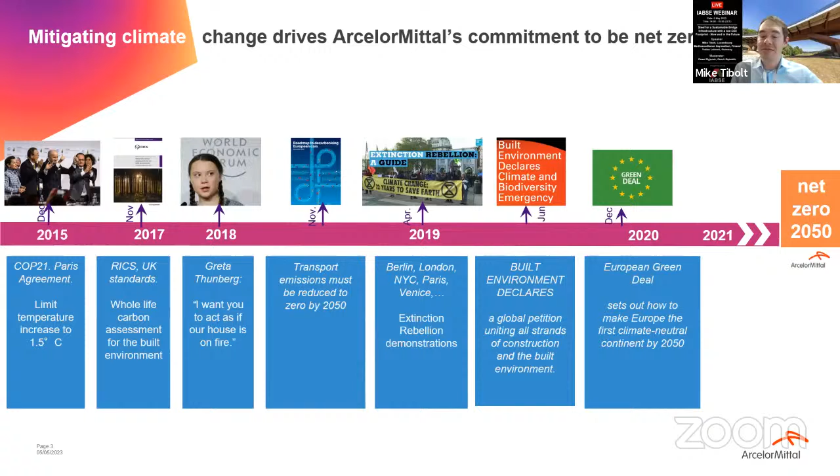That's why, as a steel industry, we have the responsibility to decarbonize and reduce our footprint. Starting with the Green Deal in December 2019 to make Europe the first climate neutral continent by 2050, ArcelorMittal commits to be net zero in 2050. If we have a look at steel, it is critical for the transition, and it is a backbone of the net zero economy, without any doubt.

As we can see, steel plays a core role in electrical vehicles, and also in the infrastructure for renewable energy, like wind turbines or solar panels. But it's also important for the next generation of high-performance buildings, helping to reduce their carbon footprint. And what's true for buildings is also the case for infrastructure, especially bridge infrastructures of the future. Here, steel will play an important role going forward.

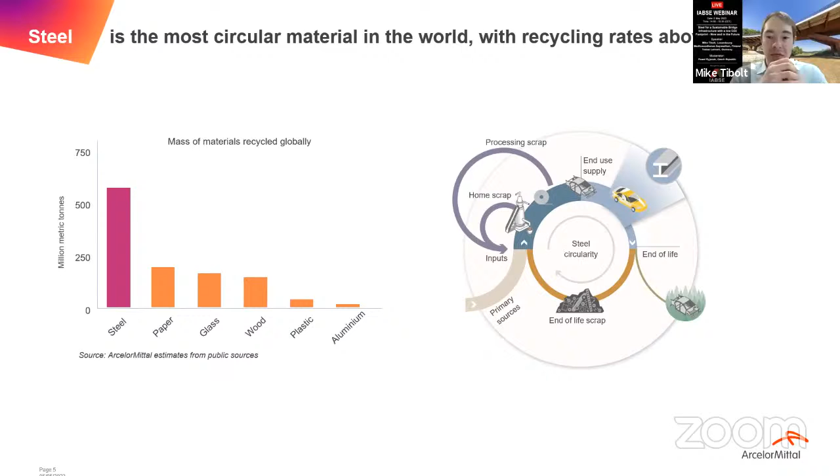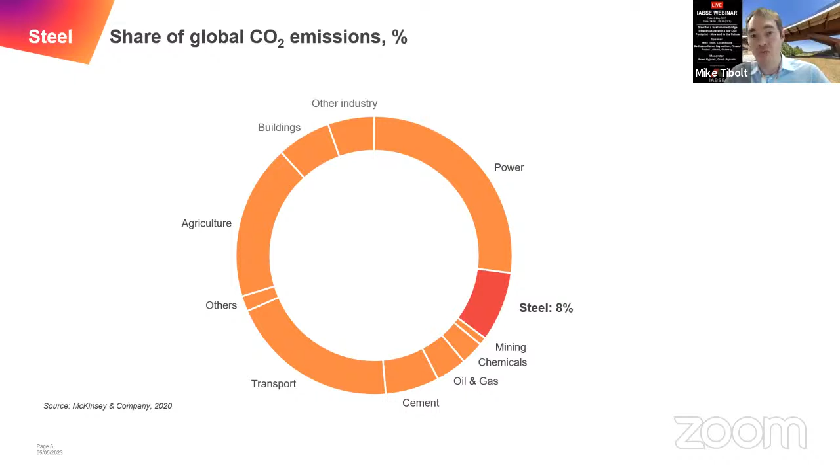Already today, steel is the most circular material globally, with a recycling rate above 85%. So we can see there is potential for steel. On the other hand, steel production is also responsible, globally, for about 8% of CO2 emissions. This is a significant number, and we have a responsibility to reduce our carbon footprint.

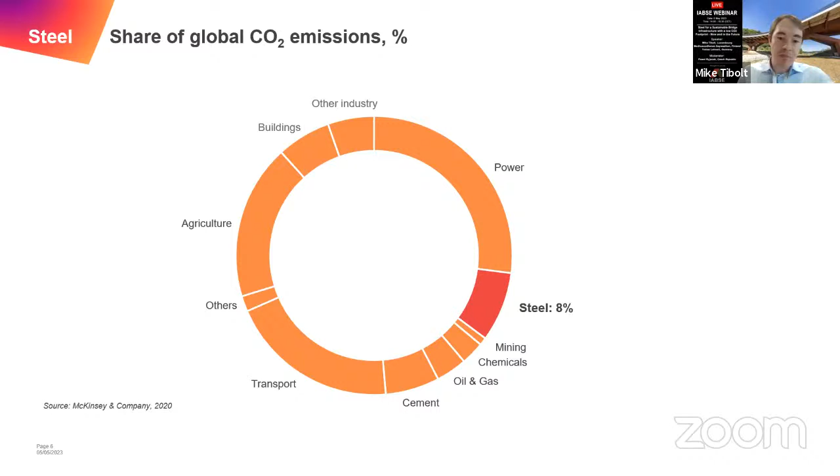I will present how this can be done from the point of view of ArcelorMittal - the action plan to decarbonize steel production.

In 2019, ArcelorMittal published its first Group Climate Action Report, stating that ArcelorMittal Europe would reduce its carbon emissions by 30% by 2030.

In 2020, the European Climate Action Report was published, and here ArcelorMittal set the net zero target for 2050.

Then, two years ago in 2021, the second Group Climate Action Report was published. On the global scale of the group, ArcelorMittal commits to reduce its CO2 emissions by 25% until 2030, and on the European level, up to 35% - an increase of 5% compared to the initial target set in 2019.

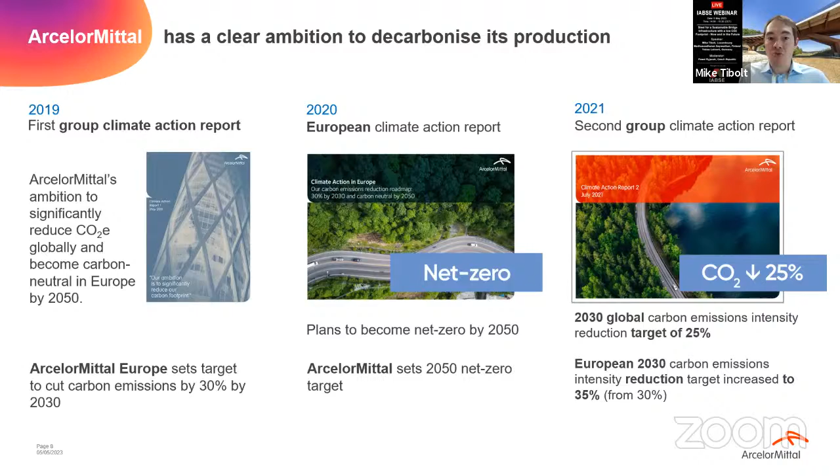The question now is, how do we get there? So let's first look at each steelmaking route commonly used to produce steel, and what the carbon footprint of each production route is.

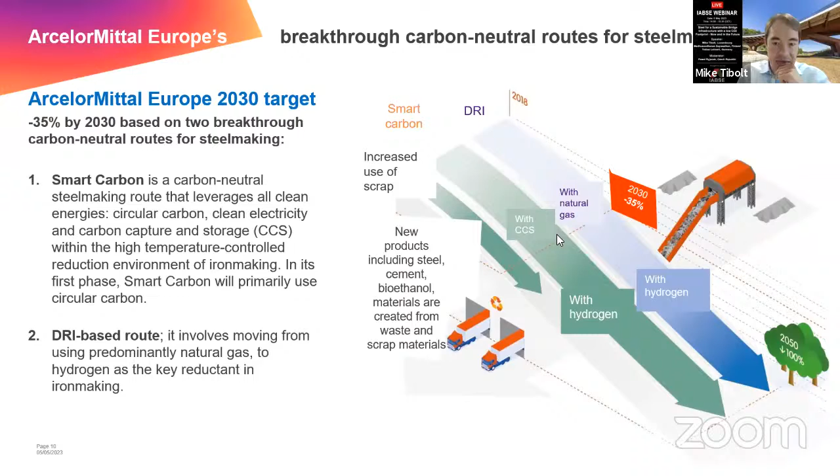So these are the technologies that we identified to become carbon neutral. Now the smart carbon route, what is ongoing there?

One example of the smart carbon route is the Torero process, where we turn wood and plastic waste into biocoal. We dry this waste and torrefy it to produce a biocoal.

This biocoal will be used in the blast furnace to reduce the coal coming from the mines. At the moment we have an industrial scale demo plant in Ghent, Belgium, with 2 reactors, each producing 40 kilotons of biocoal per year. It is expected to start in 2023 for one of the reactors.

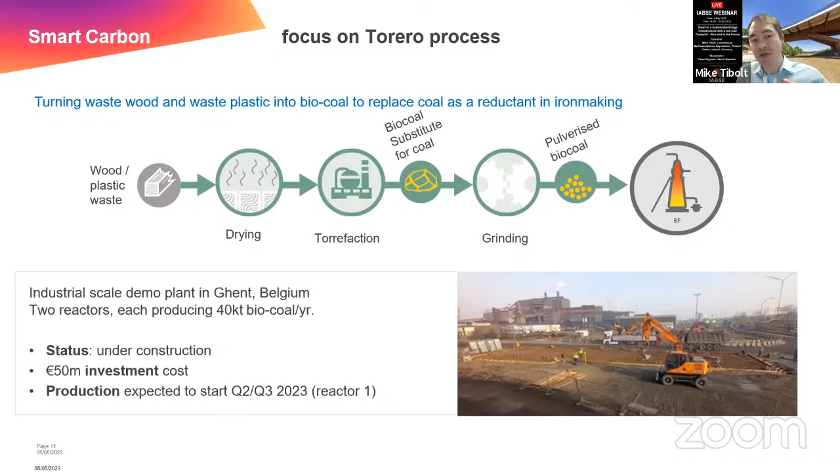This will help us reduce CO2 emissions already in the blast furnace, corresponding to the smart carbon route. Then on the DRI route, the first step is to replace natural gas, currently used as a reductant, by hydrogen. In the first step this will be blue hydrogen, meaning hydrogen produced by electricity not coming 100% from renewable sources.

And this will be the case in the second step, to switch from blue hydrogen to green hydrogen, produced from electricity that is 100% renewable, mainly solar and wind. By doing so, we can achieve the target of being net zero in 2050. This is the long-term perspective, step 2.

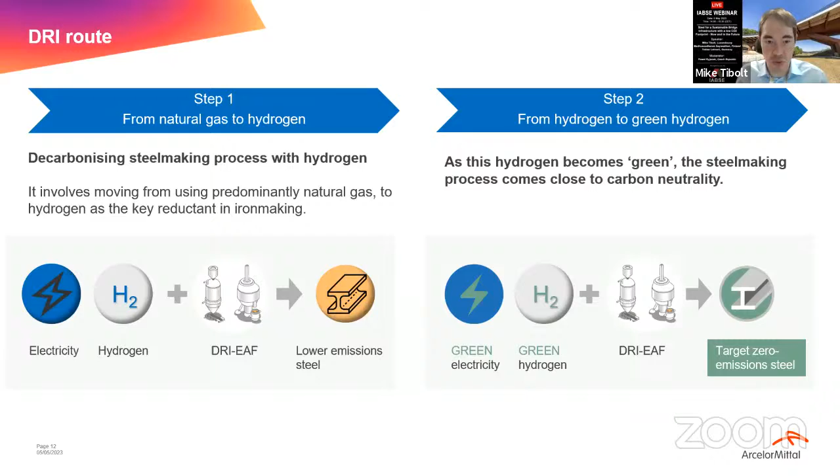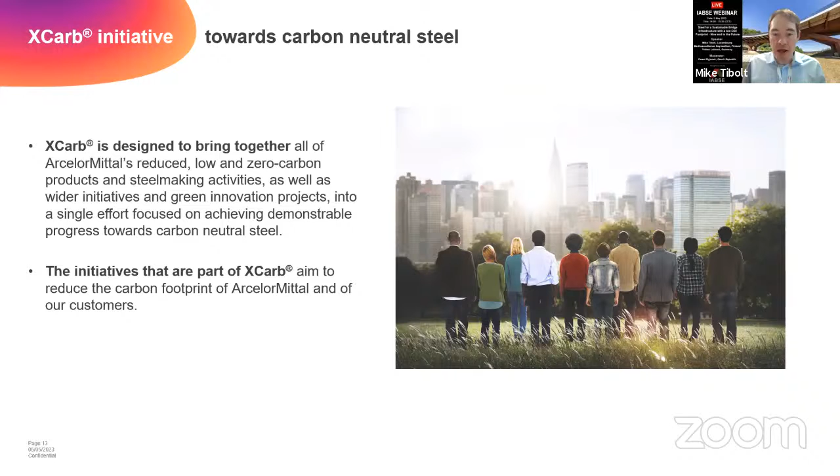With all these efforts already planned and ongoing, we launched what we call the X-Carb brand. This is designed to bring together all of our reduced, low and zero carbon products and steelmaking activities, and to put on the market a steel product with an already low emission embodied carbon footprint, working under the umbrella of the X-Carb brand. This is what I will present in the upcoming slide.

Starting with X-Carb recycled and renewably produced: this brand covers all steel produced in the secondary production route, meaning by electric arc furnace, using 100% green electricity purchased via guarantees of origin in the European system, feeding the whole production line with this energy, and using up to 100% scrap.

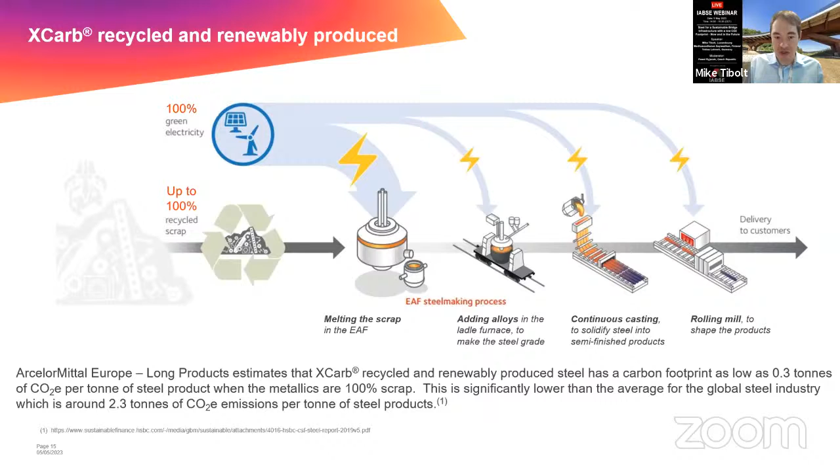By doing so, we can reduce the carbon footprint of the product down to about 0.3 tons of CO2 equivalent per ton of steel. This is significantly lower than the current average of steel production, which lies at 2.3 tons of CO2 emissions. This is the ideal, and this is how it works.

So what can we guarantee to the customer? As I said, X-Carb recycled and renewably produced is certified, and this certificate guarantees that the electric energy used to make the steel comes from renewable sources, mainly solar and wind power. The certification process has 4 steps.

In the first step, we purchase renewable electricity via the guarantee of origin in the European system. Then we follow up this order system, so the guarantee of origin is used to produce the steel, and later it is eliminated from the system so it's not used twice or several times for the same steel.

For step 3, we deliver the material documentation with the X-Carb certificate, and finally deliver the final product to the customers. So this is a product which is already on the market and available.

We also have environmental product declarations, instruments to communicate publicly about the key environmental impact of specific products. These EPDs are based on life cycle assessments according to corresponding standards and are independently verified. We have an EPD for our hot rolled sections with a value of 333 kilograms of CO2 equivalent per ton of steel.

We have them for sheet piles, which can also be used for example for bridge abutments, with a value of 370, and for rebars, with a value of 300 kilograms of CO2. Now it is like it is.

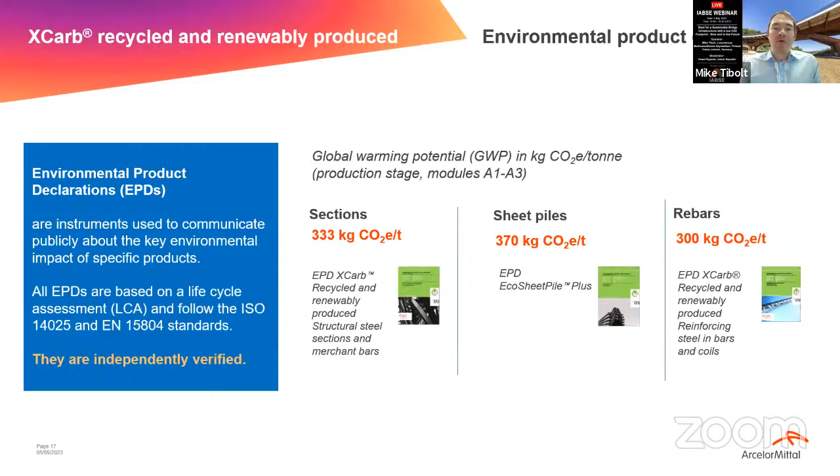We know that each country can also have its specific rules and criteria, so a general EPD will not be sufficient to cover the market. For example, in France they have an EPD which is called FDES.

It covers additional steps in the use of steel, like for example the transportation of the steel product from the mill to the construction site and the mounting on construction site. And here we have a value also of 388.

We have an Eco Sheet Pile Plus EPD for sheet piles in the US and also for the Dutch market, so to comply with this specific criteria on each market.

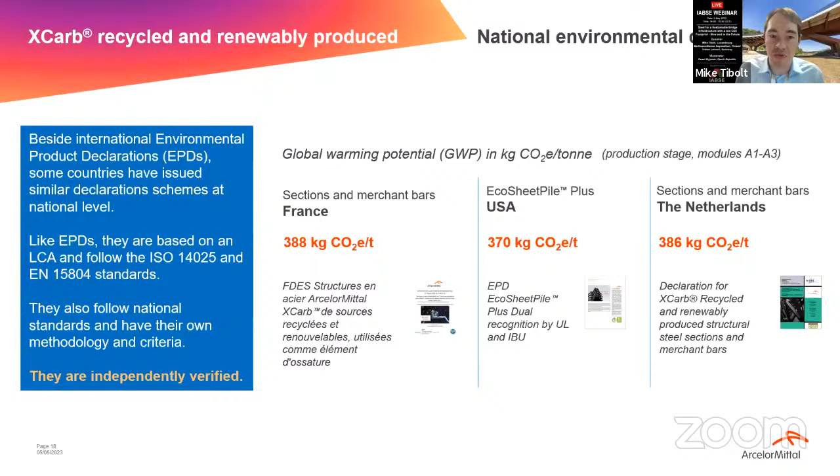Then we also have this brand X-Carb recycled and renewably produced for our heavy plates. These are plates produced by slabs. The slabs are produced in electric arc furnace route using 100% scrap and 100% green electricity. Then the slab is transported to the rolling mill in Gijón, Spain by ship and road, where 90% is represented by ship transportation. And then in the mill, it will be rolled to the final plate.

And here, if we sum up the emissions, we will lie between 0.9 and 1.1 ton of CO2 for the product stage A1 to A3, so manufacturing and production of the product.

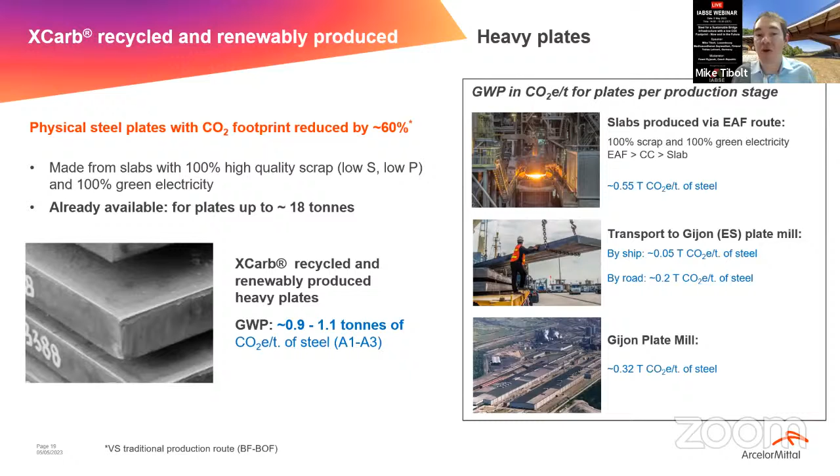And what is coming soon is that we will also have an EPD for those heavy plates under the X-Carb brand. This is foreseen in Q3 2023, in addition to the EPD which we already have for the plates produced by the blast furnace. I will come back to this in a second.

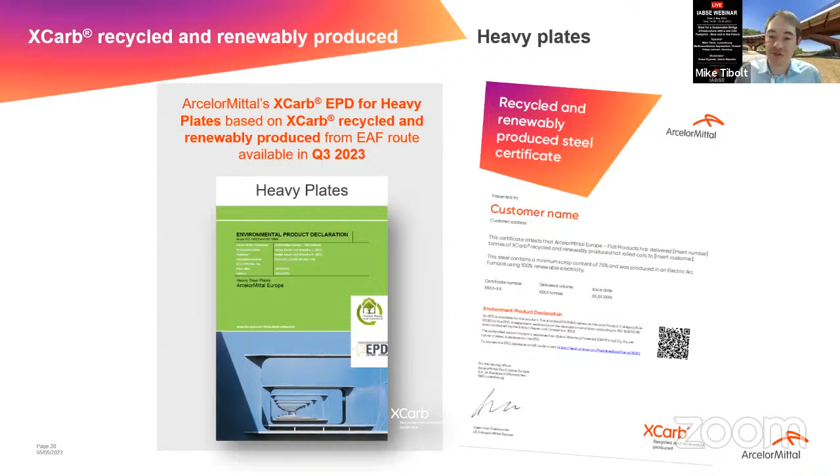And of course you will also get a certificate, as is the case for our hot rolled sections and sheet piles. Then for products which are not coming from the electric arc furnace, but which are produced via the blast furnace, we have also a brand called X-Carb Green Steel Certificates. These certificates can be purchased alongside any steel sold by ArcelorMittal Europe flat products, because mainly the flat products are produced in the blast furnace right now.

And the CO2 reduction based on the certificate is coming mainly at the moment from reducing fossil coal consumption in the blast furnace by replacing it with natural gas, and also by re-injecting the coke oven gases back into the blast furnace. Later on we will then move to the smart carbon route, as I explained in my former slide, like the Torero project.

This is independently verified by DNV, and these certificates are to be understood as a transitional tool rather than a final solution, because it is sure that we can still enhance the reduction of our CO2 emissions in the products. That's why it's only a transition right now, but to make our customers already part of the efforts that we are doing to reduce our CO2 emissions.

and to make them also part of this reduction for their specific projects. Then, which products are available? If we come back to the X-Carb recycled and renewably produced, so the steel produced under the electric arc furnace, we have the hot rolled sections and heavy plates.

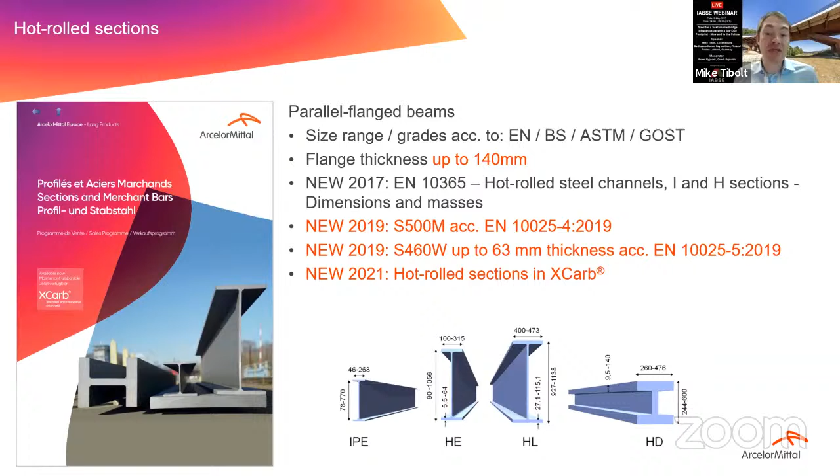Now, where can we use these hot rolled sections in bridges to reduce the carbon footprint of the bridge? They are very economic and sustainable for small and medium span bridges, mainly for span ranges between 10 and 45 meters. So they can be used in filler beam bridges and steel composite bridges.

You can also do some fancy projects like using the composite dowel, where you cut dowels in the hot rolled sections to have a composite action between the concrete deck and the steel. And they can also be used in the arches of network arch bridges.

As you can see in the picture, this is a bridge in Poland which has been realized, and we have several such bridges already done, but also for other standard bridges like trusses, truss bridges, or temporary bridges, where they can be used in a very efficient way.

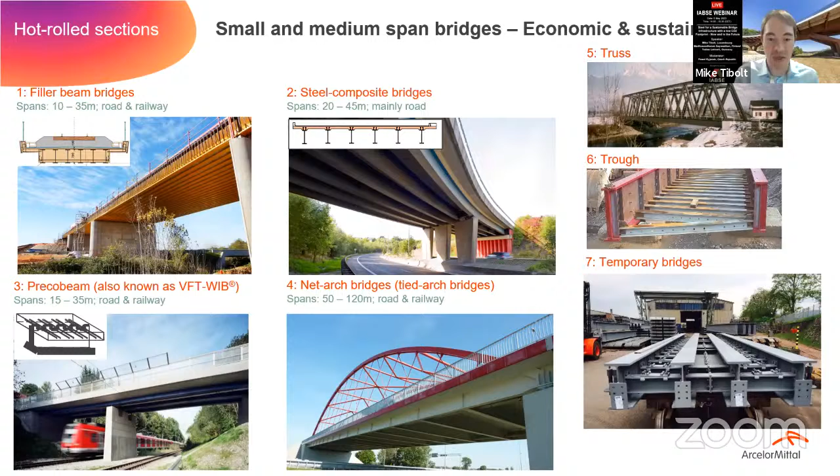Mainly covering non-alloyed steel, normalized steel, thermomechanically processed steel, and also weathering steels. For the weathering steels, we are currently working on putting on the market the S355K2 steel grade with the certificate NF Aciers in France up to 100 millimeters. We are also working to develop weathering steel in high-strength steel S460 up to 30 millimeters.

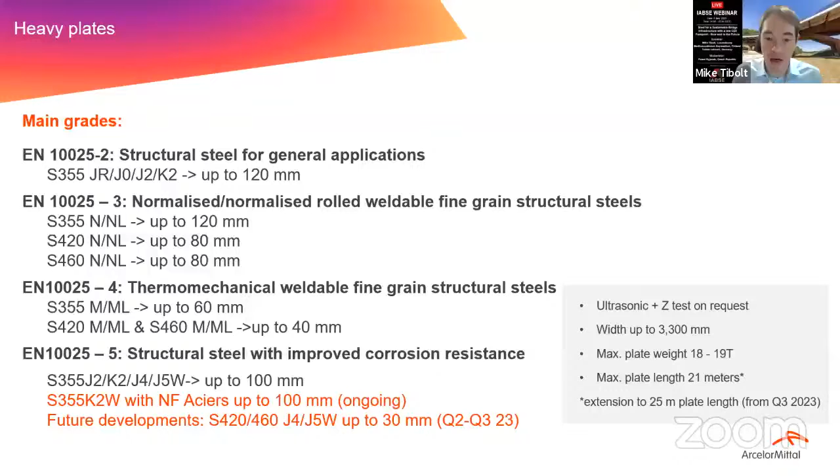Why high-strength steel is important, I will show you in the coming slides when I talk about a recent bridge project which has already been realized using the X-Carb brand. There is a Europe's longest cycle bridge made from X-Carb recycled and renewably produced steel.

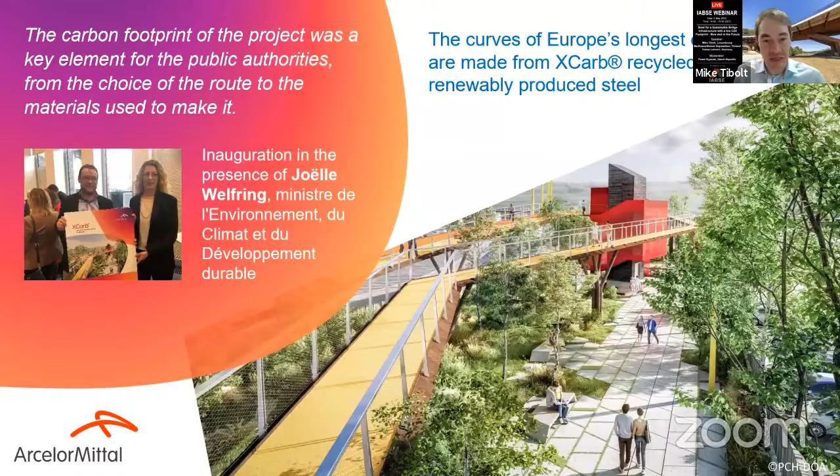Then we have here the first European road bridge, called the Osmolice Bridge in Poland, which combines the X-Carb recycled and renewably produced steel together with weathering steel in high-strength steel S460.

Why was this important to have these choices? First of all, the investor would like to have an easy and not so heavy solution. That's why he went for a composite bridge solution with hot rolled sections. And by using weathering steel, there was no need to put paint on the bridge, because with weathering steel we have this auto-protection, this patina, which forms automatically and ensures corrosion protection.

So we do not need to redo the painting over the lifetime of the bridge, meaning maintenance efforts are reduced, and of course there's no detrimental negative impact on the environment coming from the painting. By combining it with the X-Carb brand, we can further reduce the CO2 footprint of the solution, and this was the driver to go for this solution.

The bridge was realized 4 weeks earlier than foreseen in the planning, because the construction was quite easy, using high-strength steel in combination with weathering steel.

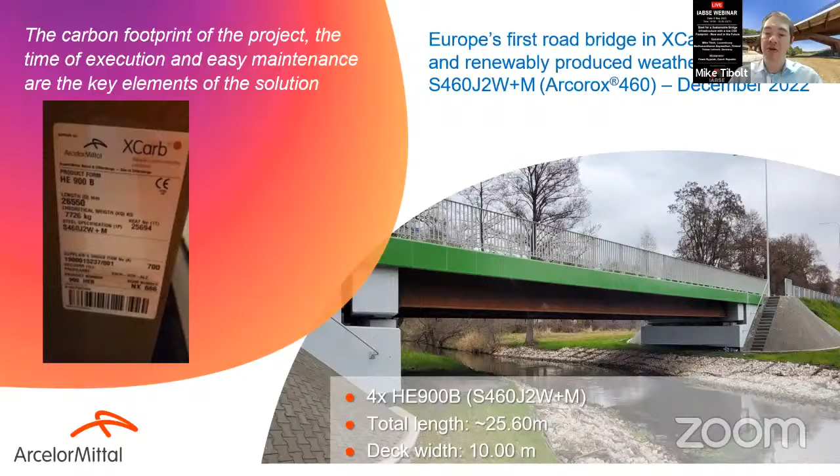We could also have a light solution, because for weathering steel, as you know, you might apply a thickness allowance to account for corrosion losses over the lifetime of the bridge. In your design, you have to reduce the thickness of the surfaces in contact with the environment, and normally you'd end up with higher profiles. But if you combine it with S460 steel, you can compensate for this effect, making the solution very attractive.

Here's a small case study, a bridge at Rosières-aux-Salines in France, which was initially foreseen with pre-stressed prefabricated concrete girders. The bridge has a total length of 108.25 meters, foreseen in 4 spans between 20 and 28 meters roughly. The slab was an in-situ concrete slab C35/45 with a thickness of 21 centimeters.

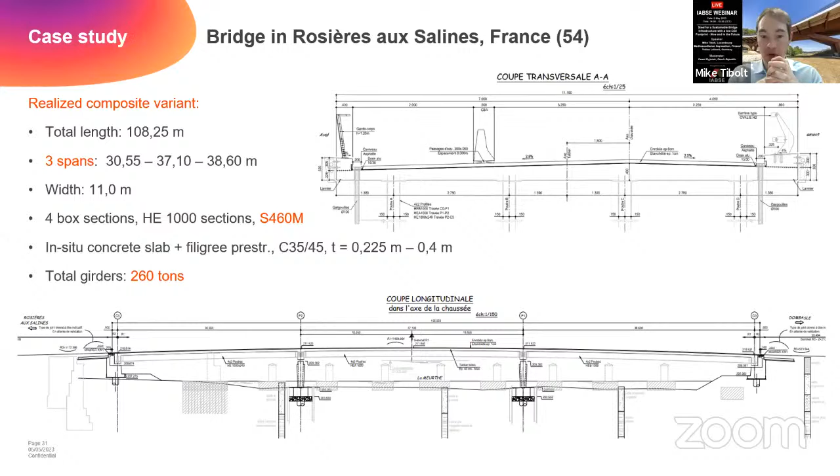The total length remained untouched, but by using the composite solution, we put 2 hot rolled sections welded together on the upper and lower flange to form a box section out of hot rolled sections, as you can see in this picture. This can be realized in the workshop.

By doing so, we could also reduce the number of spans down to 3, with spans between 30 and 38 meters, using 4 box sections in HE 1000 profiles in steel grade S460 - again, high strength steel to reduce the section size. My colleague Tobias Lehnert will give insight into why it's useful to use high strength steel, because it also reduces the material consumption of your project.

The concrete slab was an in-situ concrete slab based on pre-stressed concrete filigree, meaning prefabricated pre-stressed concrete elements, with a variable thickness between 22 and 40 centimeters.

The total tonnage of the steel girders was 260 tons, a little less than for the concrete solutions. We're also using concrete cross-beam technology at the piers, which allows us to deliver the steel beam in span lengths, in one single piece, meaning no welding or bolted splices were necessary on construction sites, which facilitates execution of the solution.

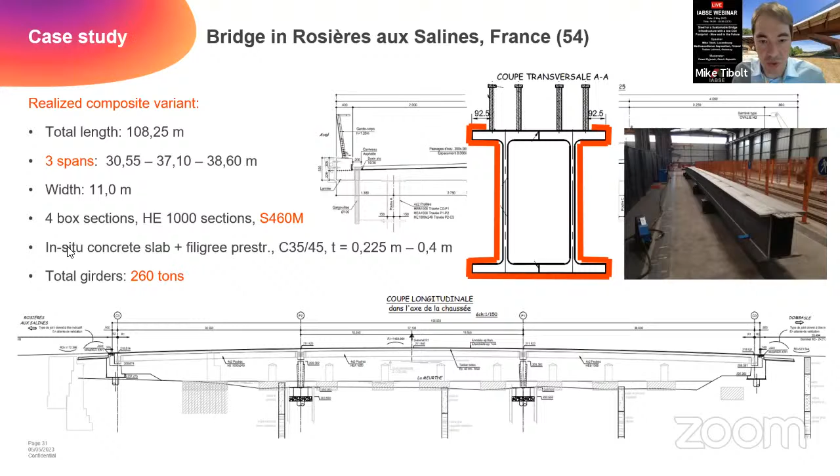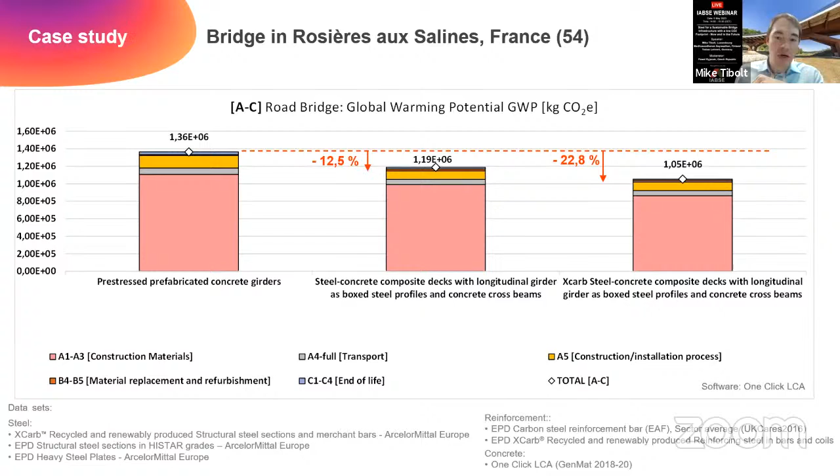Here you can see the bridge as it has been realized in France, close to Nancy. You can now see this bridge—it's already finished, so in action, really. And that was from my side, so I thank you for your attention.

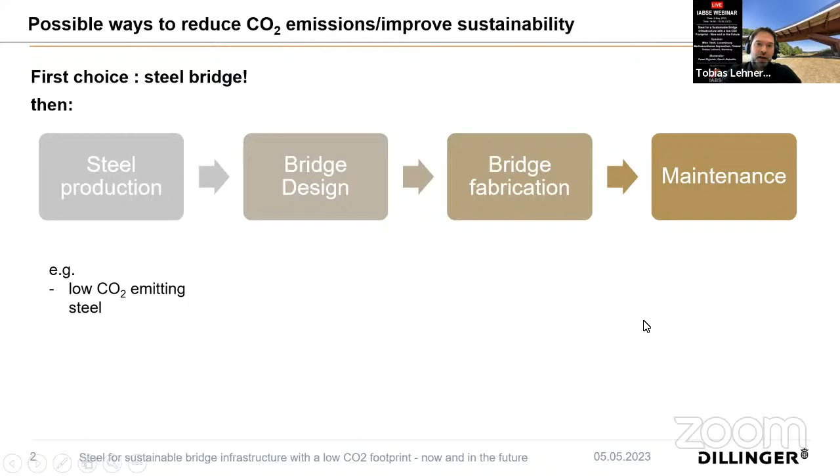But bridges also very often need the product heavy plate. So we have a lot, especially for large bridges, they're built out of the steel product heavy plate. And traditionally, the steel product heavy plate in Europe, but also globally, is mainly produced by the primary route, so by the blast furnace.

As explained in the last presentation, this primary route, the blast furnace, using iron ore and having the iron ore reduced by coal or coke in the blast furnace, emits a lot of CO2 emissions per ton of steel. And it is currently not possible, due to quality reasons but also just due to the availability of scrap, that the whole steel industry switches to a secondary route. So even in the future, we will always need a primary route which brings new primary steel into this circle of recycling. That means that for the product of heavy plate, the availability is currently quite limited of steels with low CO2 footprint.

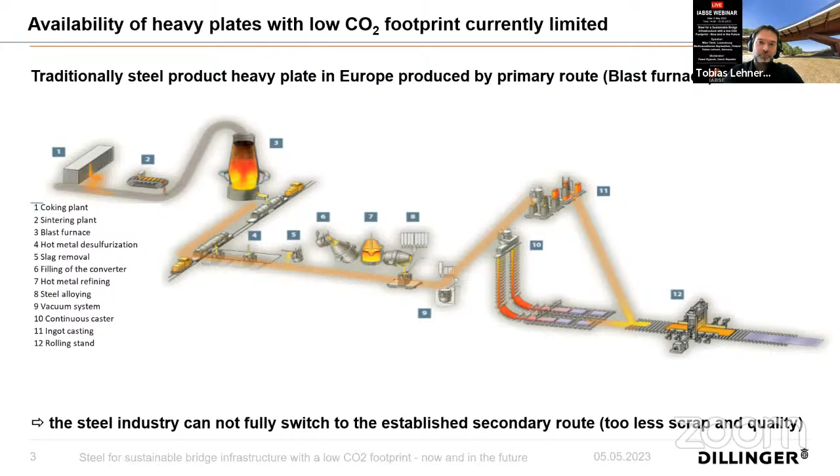And that means, yeah, we also have to transform the primary route towards less CO2 emissions. Mike explained also the possibilities there, for example, by going to a DRI production, direct reduction, plus electric arc furnaces. So there exist several routes in the steel industry which are currently followed. We also have a brand for our transformation. It's called Pure Steel Plus, and that's our way to transform our company to a low-emitting steel production company.

I will just shortly show, because it was already explained before, what is the initial situation in such a blast furnace mill. So we have a coking plant, we have a blast furnace, and the basic oxygen furnace, and the emissions are mainly coming from the blast furnace, where we need the coal to reduce the iron ore, so to take away the oxide. And if we combine the C from the coal with the oxide from the iron oxide, we will end up with CO2 emissions. And then in the next step in the steel plant, it's a basic oxygen furnace.

So we blow oxygen on the liquid steel or iron in this case, and then take away again the C, the carbon, and we again have CO2 emissions. So these two processes are responsible for most of the emissions in such a primary, currently blast furnace primary route. And it's not only that the coal is needed for heating, it's actually a chemical reaction. So we need the coal as a chemical reducing agent in this process. So it's not that easy to replace it, but there exist some possibilities to do so.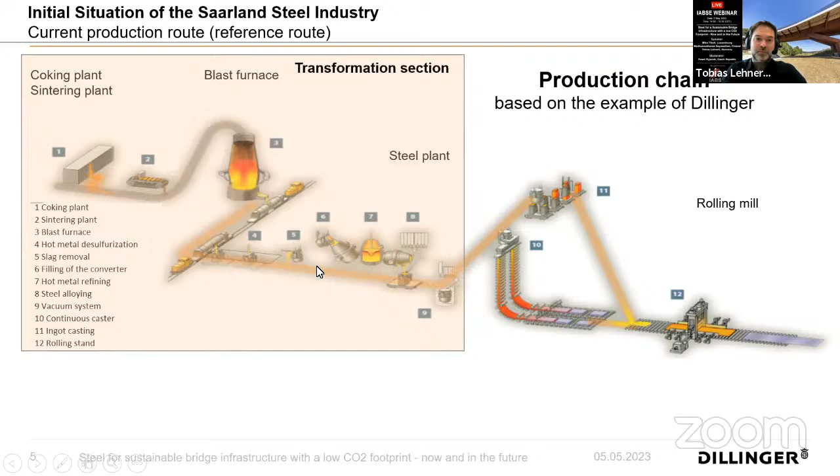But that means we have to transform all of these production steps in our plant, which, if you look at the full production chain, is quite a bit - it's more than half of the plant. And if we speak of transforming, it's a nice word, but in the end it means take it away and do something else. So that has an impact on the entire production chain. And it's clear that such a process needs some time to change to this new production.

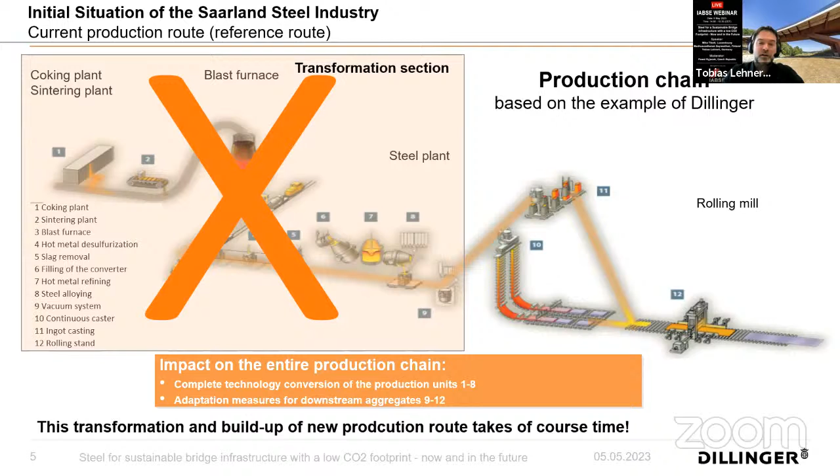But generally, of course, the steel industry is doing a lot in sustainability. Dillinger, we received, for example, the Gold Award in EcoVadis. We are listed as a Carbon Disclosure Project. We are also signing the Science-Based Target Initiative to declare the commitment of our roadmap to be aligned with the climate goals. So these are very important points.

But as I said, in order to change and to transform, we need to have a plan, we need to have a roadmap, and we need to change our production. And here in Dillingen, we are doing our transformation in 2 phases. So in the status quo, we have 2 blast furnaces in our production and several basic oxygen furnaces.

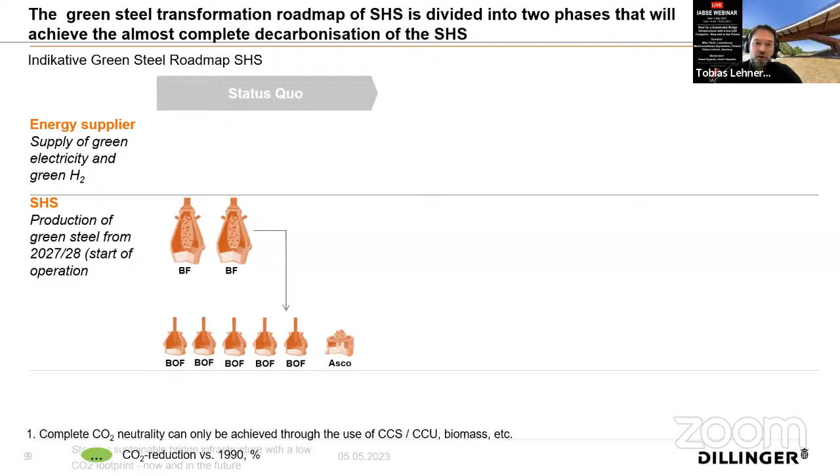And in phase 1, which will be happening until 2030, we will shut down 1 blast furnace and build 1 DRI plant with electric arc furnaces. So already a big portion of the production will be changed to this new production route. And in phase 2, then also the second blast furnace will be shut down.

So that means that in some years, because not only us have these plans - other steel mills, other steel companies have similar transformation plans - the availability of steel produced by new low-emitting routes will increase over time significantly.

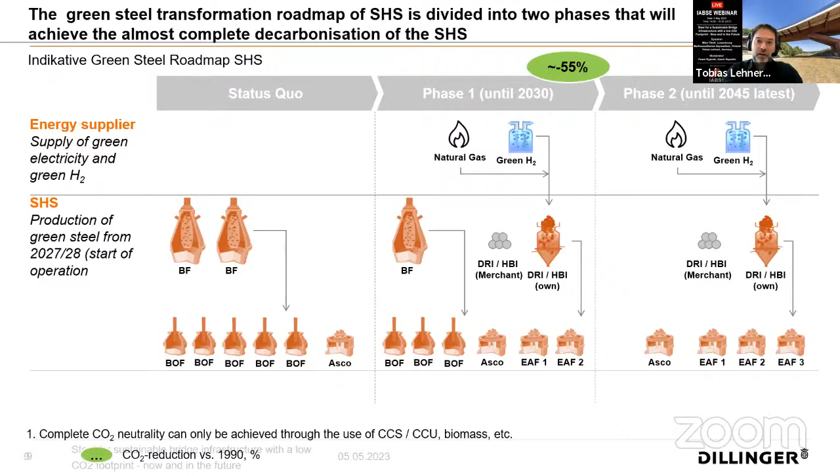But as I said, yeah, it may not be possible for all products to get already the lowest CO2 emitting steel. So what else can be done now already to reduce CO2 emissions in bridge construction? There are several starting points where you can decide for a more sustainable way. And one, already a bit touched on in Mike's presentation, is the use of higher strength steel. This is an important decision in the bridge design, which affects the sustainability of the project.

So what would be the benefits of using higher strength steel? Just a simple example: if you calculate from S355 to an S460, in an ideal case a thickness reduction of up to 30% is possible. In reality, usually you end up saving 15% to 20%, which has multiple effects on the CO2 footprint.

The first and most significant point is less steel, meaning less CO2 emissions. But also the component weights are lower, so you can use bigger assembly units, fewer truckloads, less traffic on the construction site. Lighter constructions also mean lighter foundations, adding further effects that impact the CO2 footprint of a project when using higher strength steel.

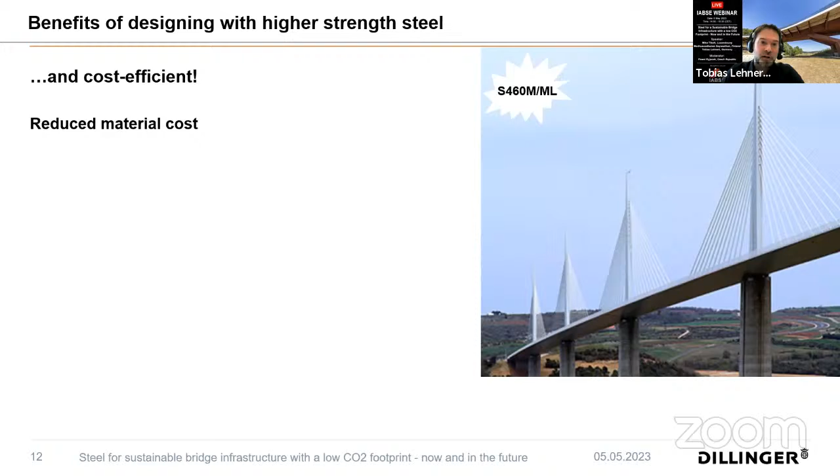This is very resource saving, because the best thing is to avoid the material, and it's already readily available. The good thing is it's also cost efficient: you have reduced material cost, but also reduced overall welding cost in fabrication, because welding cost grows over-proportionally with plate thickness. If the plate thickness can be reduced, you have reduced weld seam volume, which has a significant impact on welding cost. So using higher strength steel in bridge building is very sustainable and highly economically efficient - it's a very good choice.

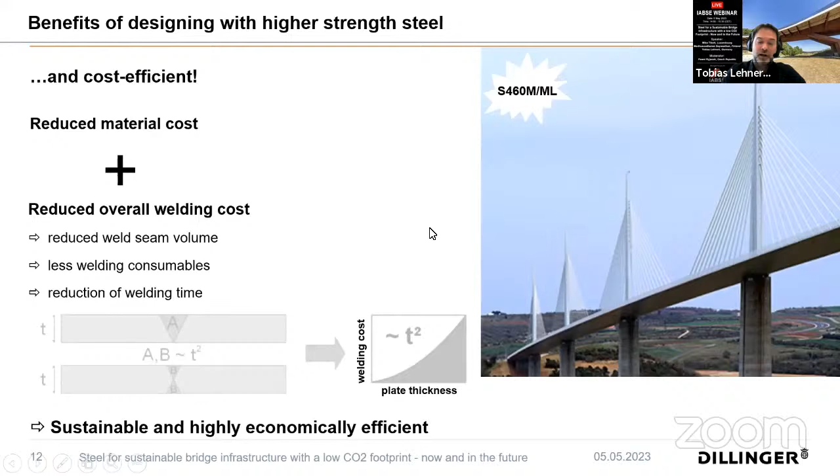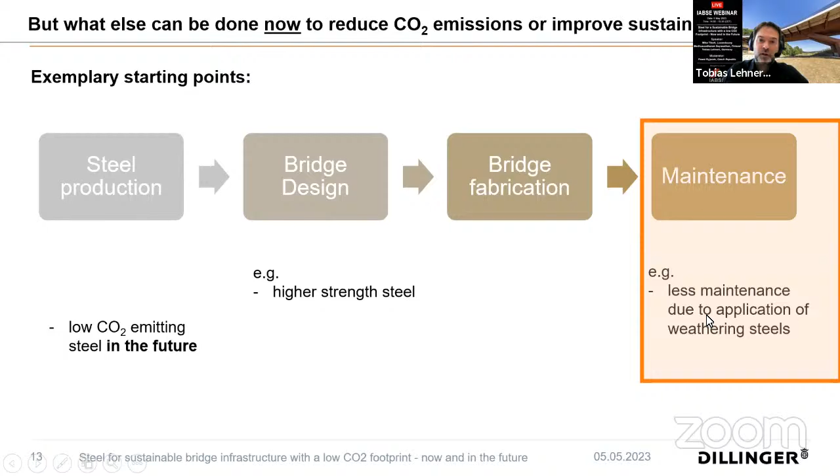Another point where we could reduce CO2 emissions already nowadays is in maintenance, for example by using weathering steels. As explained before, weathering steels build their own patina, which saves them from further corrosion, so no repainting is necessary. This has several effects on maintenance intervals, and also, for example on a motorway crossing, less construction means less traffic jams. There was a study done in the SBRI project which showed up to 5% less CO2 emissions if a motorway crossing is built with weathering steel, because of the avoidance in traffic and resulting CO2 emissions.

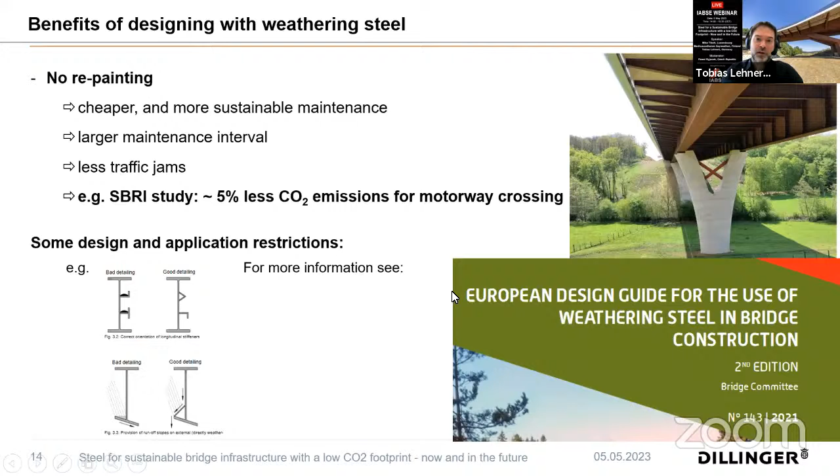There are some design application restrictions needed, but these can be found in the new European design guide, so these weathering steel grades are already ready to use. In the past the usability of weathering steel grades was quite limited, because only limited steel grades were available - strength was limited to S355, and toughness levels were also limited. So especially bridges where you need higher strength or higher toughness were not possible with weathering steel grades.

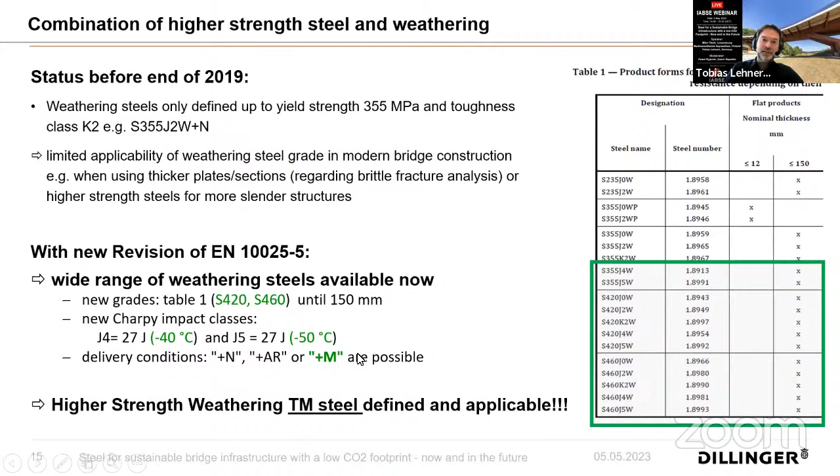But with the new revision this is no problem. We now have a wide range of weathering steels available, up to 460 steel strength, with minus 50 degrees Charpy impact toughness, and importantly also in the thermomechanically rolled delivery condition. So nowadays we have a higher strength weathering TM steel defined and applicable. It's very important that thermomechanically rolled steels are now allowed, because these TM steels have benefits both in steel production and later in fabrication in the bridge building workshops.

They can be welded without, or at least with a significant reduction of, preheating. This again saves energy, which means reduced CO2 emissions. Besides that, it's also very important for job safety, because you do not need to preheat. If you look at the pictures shown here, you can imagine that preheating the structures and then welding is quite hard work, so if you can avoid the preheating it's also very good for job safety.

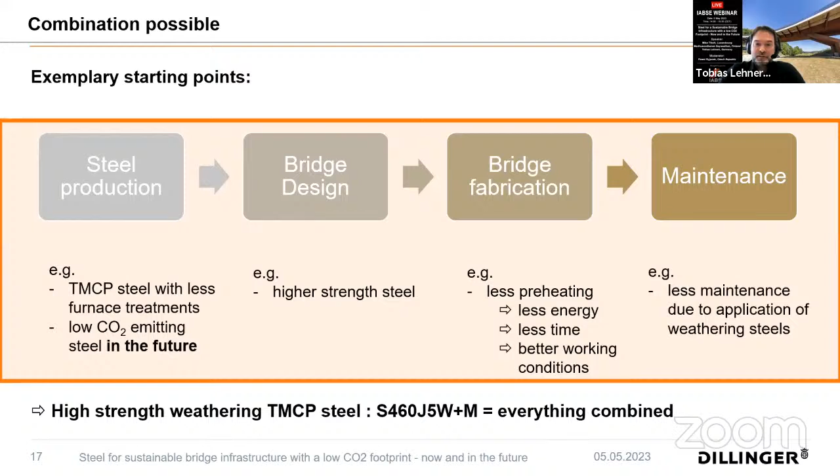So there's a possibility to combine all these things nowadays, for example by using high-strength weathering steel. These high-strength weathering steel grades are also available as a brand steel from us - it's a DIWETEN 460, which gives additional benefits on the carbon footprint equivalent, with better weldability for fabrication. It's available in very large dimensions and very wide widths - as with all our plates, we can deliver plates up to 4.6, even 5 meters wide, plate weights up to 42 tons, which again avoids welding and is good for CO2 emissions and sustainability.

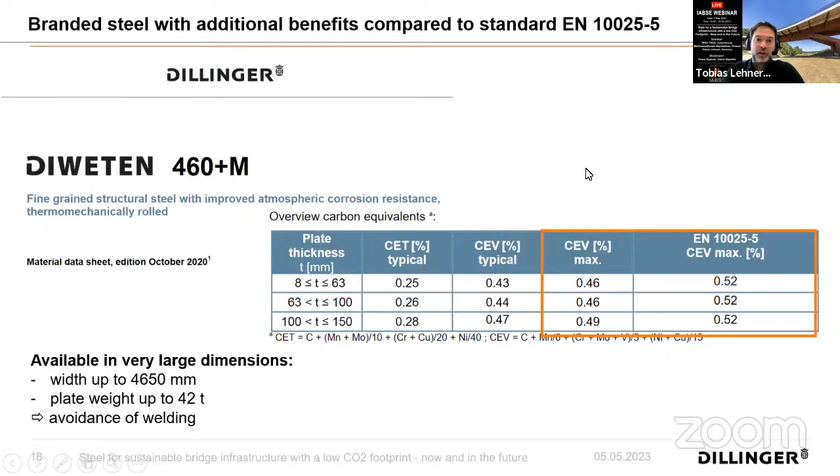And here's one nice example.

It's the Carrington Bridge in UK that was originally planned with S355 steel. In the end, it was realized with S460 thermomechanical rolled steel. It was planned as a 6-span bridge, but it could then be produced as a 3-span bridge with 6 weeks reduction in construction time.

Very importantly, 3 piers could be avoided, and 15% less steel was used. Overall, this has a significant impact on CO2 emissions if you can avoid the concrete of the piers and foundations, as well as the steel emissions. We unfortunately do not have an LCA calculation for this project, but I think it's quite obvious it has a much more significant impact on the CO2 footprint.

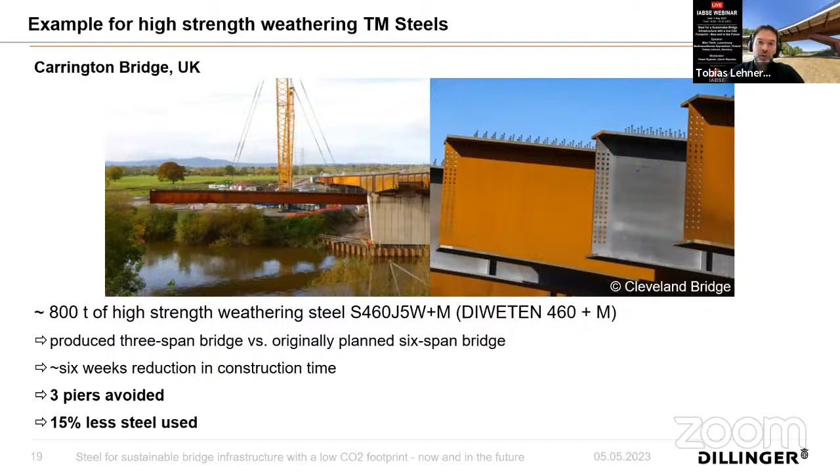So with this, I want to finalize my presentation, a quick overview of possibilities where you can, together with the steel industry, already now but also in the future, improve sustainability and CO2 emissions of your bridge project. And I would want to close with something that we can just imagine together.

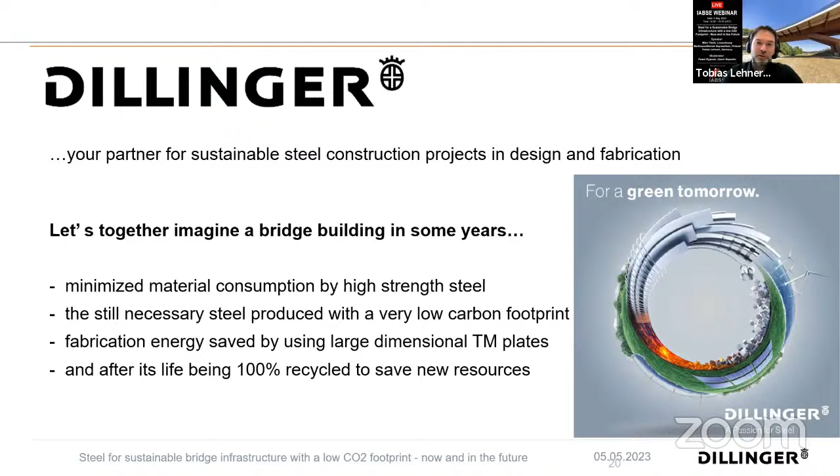A bridge that will be built in some years, minimizing material consumption by high-strength steel, and the steel that is still necessary produced with a very low carbon footprint, less fabrication energy because you can use large dimensional TM plates. And after the life of the bridge, it will be 100% recycled to become a new bridge or a new project. I think this sounds like a nice vision that we could all work for. By that, I want to thank you for your time, and we're ready for questions.

I will take you through today the fossil-free steel for bridge construction. In today's agenda, we will touch upon the challenges that the construction industry is facing today, and as a solution from SSAB, the fossil-free steel and SSAB Zero, and we will also go through the sustainable upgrading concept from SSAB.

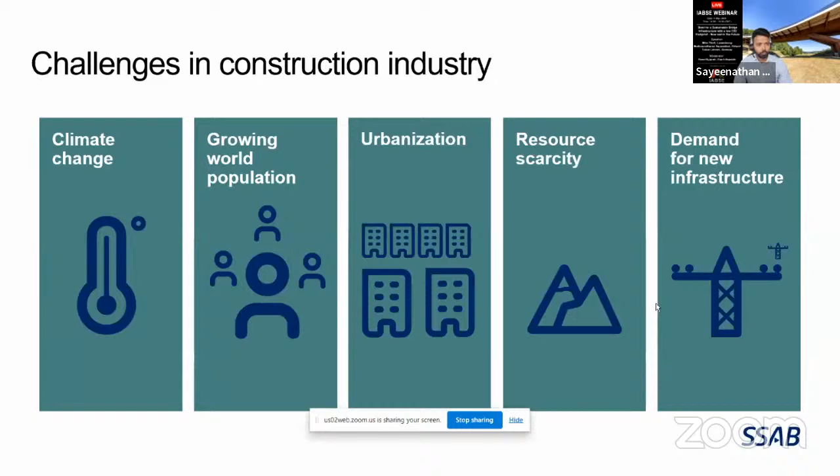If you look at the challenges of the construction industry today, climate change is touching all of us, the entire world, not just the construction industry. On top of that, with the increasing population, urbanization, and more resources getting scarcer, there is more need for new infrastructure. This means construction cannot slow down, and there will be more and more buildings and bridges that need to be built.

In the end, construction industry is responsible for 39% of global CO2 emissions. What's interesting is out of this 39%, 11% of those emissions are from embodied carbon, and the major part is, of course, operational carbon from the use phase. If construction industry has to decarbonize, it's important to address both operational and embodied carbon.

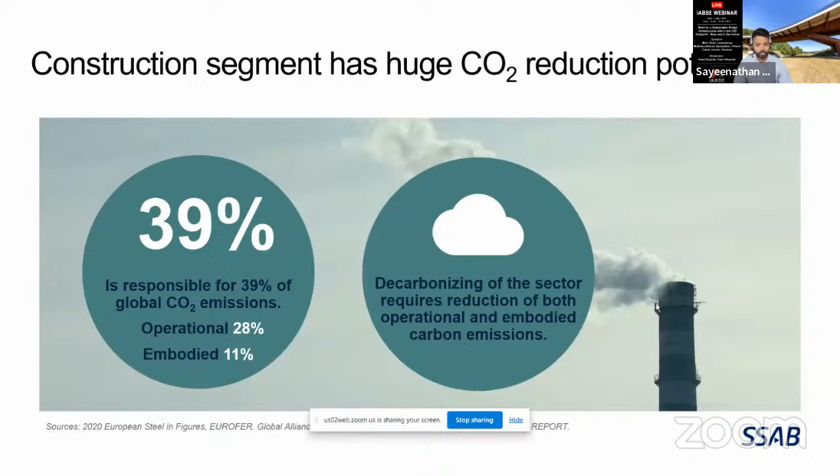What is embodied carbon? It's the carbon footprint of the materials that go into construction across the entire life cycle, starting from the production of raw material until the construction is taken away. So how do we reduce the carbon footprint of the material that goes into it? There are many solutions, and today we're going to talk about three options from SSAB.

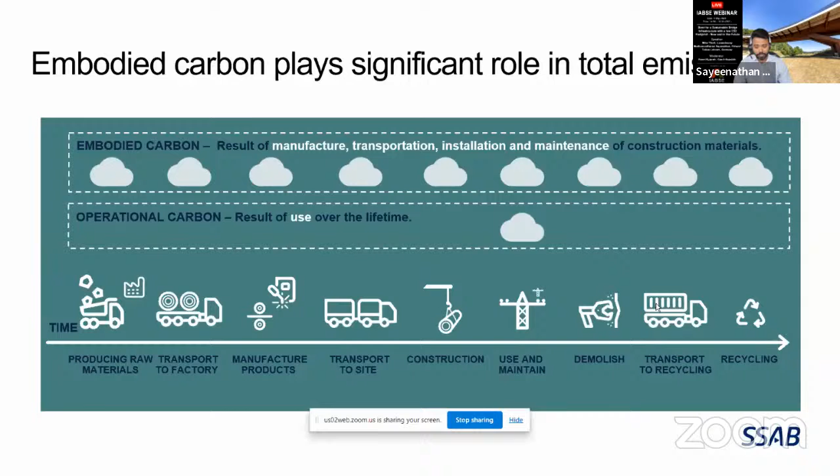How are steel and construction related? I think this is a no-brainer, because steel is used extensively in the construction industry. About 35% of steel's use in Europe comes from the construction industry, and therefore steel has a big role to play in the carbon footprint of the construction industry. So much so that if we consider the Swedish construction industry, about 21% of CO2 emissions from it come from steel, both construction and reinforcement steel combined.

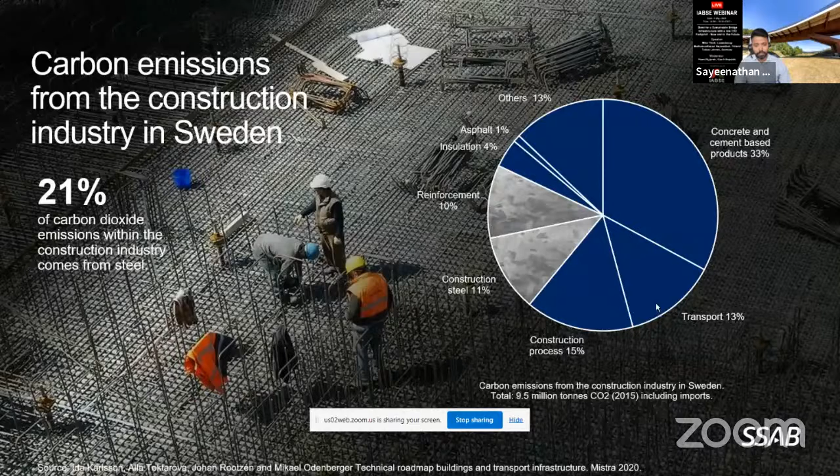How do we address this? Is there one specific way? Well, there are different options. If we look at it, the best way is to build nothing, and I think we are not in that phase right now. As you saw, with growing population, we need to build more. So build nothing or build less are not options for us. The option we have is to build smart, which means optimizing the materials we have, being aware of the carbon footprint these materials come with, and being more efficient in constructing whatever we are up to. Building smart is the goal, achieved by using or designing materials that have a lower carbon footprint.

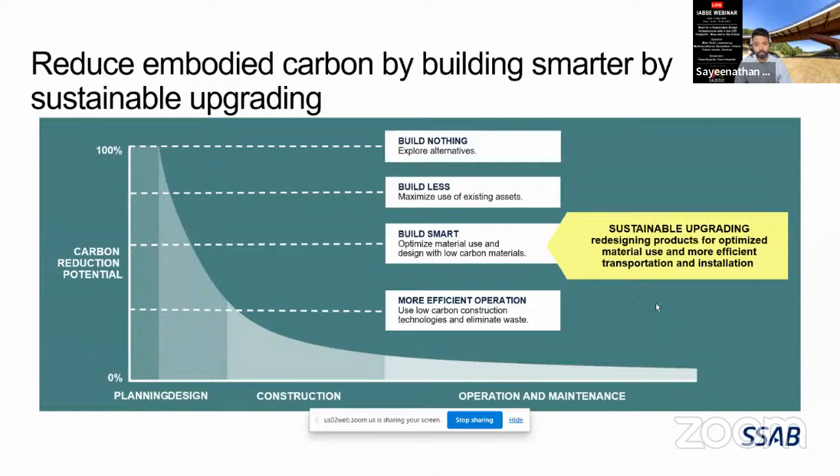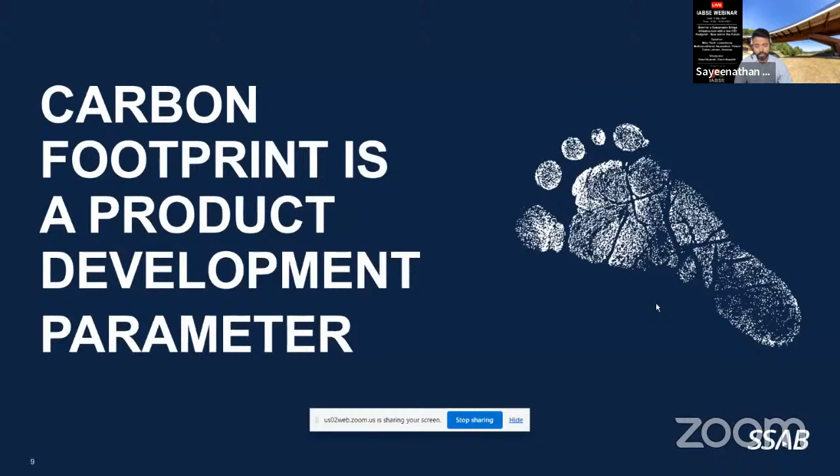I would like to say that carbon footprint is not a nice to have anymore, and the carbon footprint of materials getting into construction is becoming a product development parameter. When you're designing a building or a bridge, carbon footprint will be one of the most important design parameters in the future if the construction industry has to decarbonize.

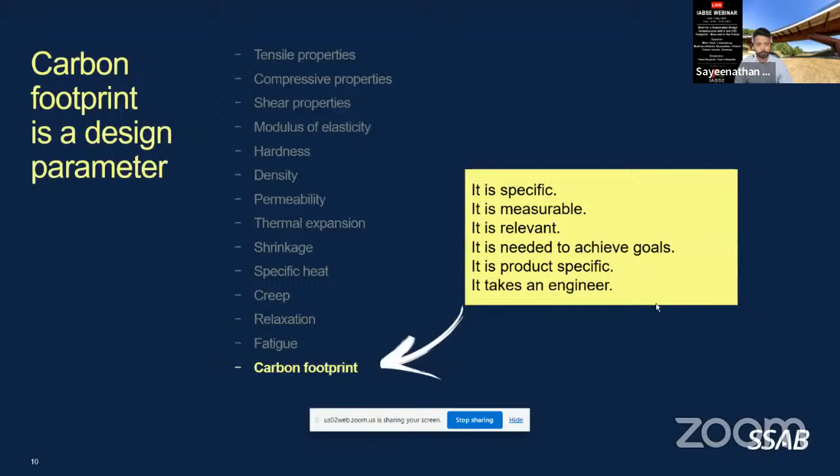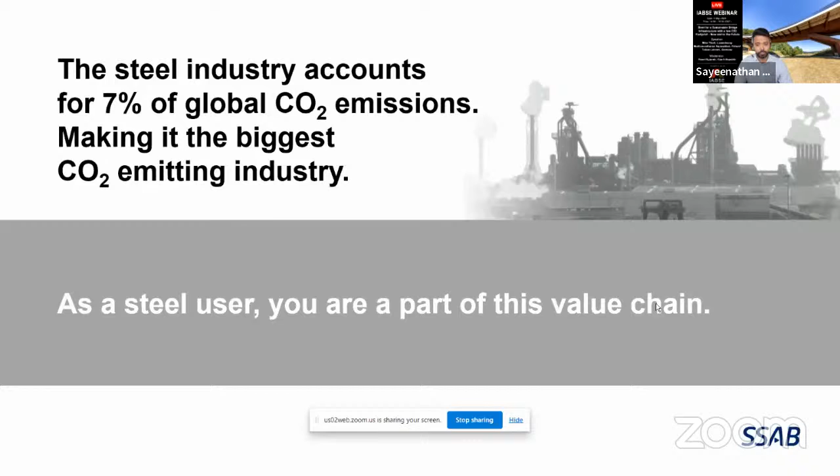As a steel user, as part of the value chain, there is a responsibility for end users in trying to reduce the carbon footprint, not just of the construction industry, but also of the steel industry, by demanding greener products.

How do we do it? Is there one solution? My previous speakers also touched upon the different ways of producing steel. Today, the demand for steel worldwide is about 1.8 billion tons, and moving forward to 2050, it's only going to go up. So the share of recycled material alone won't be enough to cover it. We need a mix of both steelmaking from recycled steel and from virgin iron ore to decarbonize the steel industry, and in turn decarbonize end user industries like construction, which is one of the biggest steel users.

The answer from SSAB is two-pronged. One is SSAB Zero, which is based on high quality recycled steel, using fossil-free electricity and fossil-free fuels in the entire value chain of the product, as well as internal transport. The other is fossil-free steel, which is sponge iron based, from virgin iron ore. There, no fossil fuels are used right from the iron ore till the end steel product. So we have both technologies we want to bring up. As I said, there is no one solution - we need both recycled steel and virgin iron ore based steel to decarbonize the steel industry, and we'll touch upon both one by one.

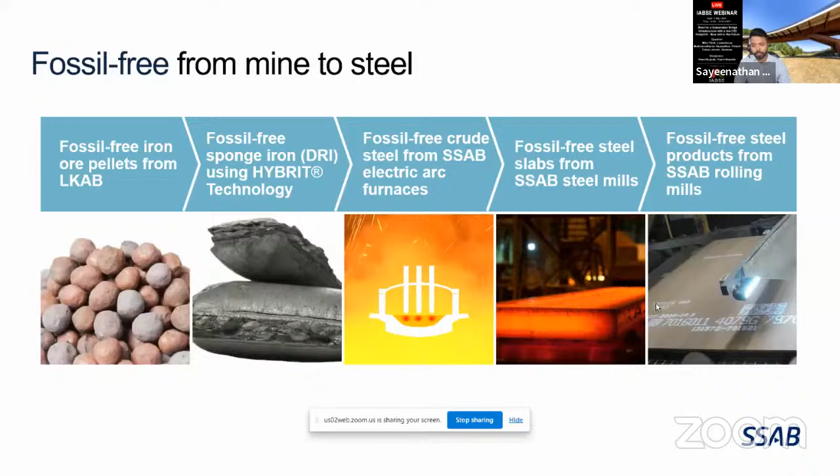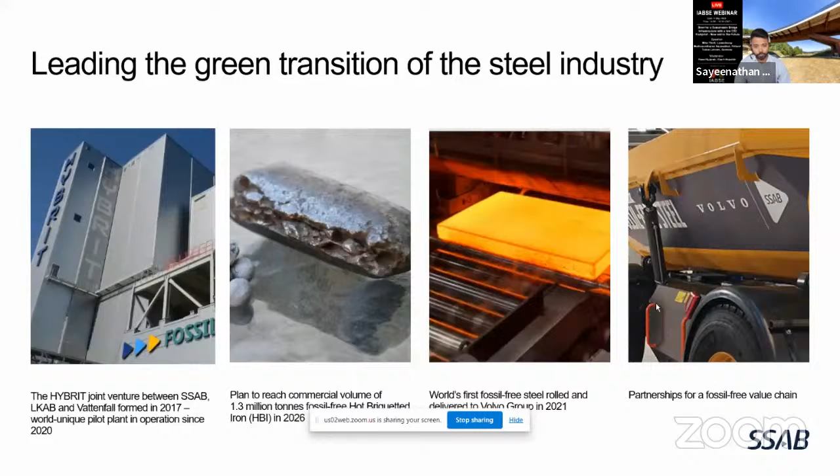HYBRIT is a joint venture of SSAB, LKAB, and Vattenfall, which started in 2017. The pilot plant has been operational since 2020, and the demonstration plant has also been started. We plan to reach about 1.3 million tons of fossil-free HBI, or hot briquetted iron, by 2026. The fossil-free steel has already been rolled - in fact, last year we delivered about 500 tons of fossil-free steel to our customer partners, and many customers have joined hands with us to decarbonize their value chain by reducing their scope 3 emissions using our fossil-free steel.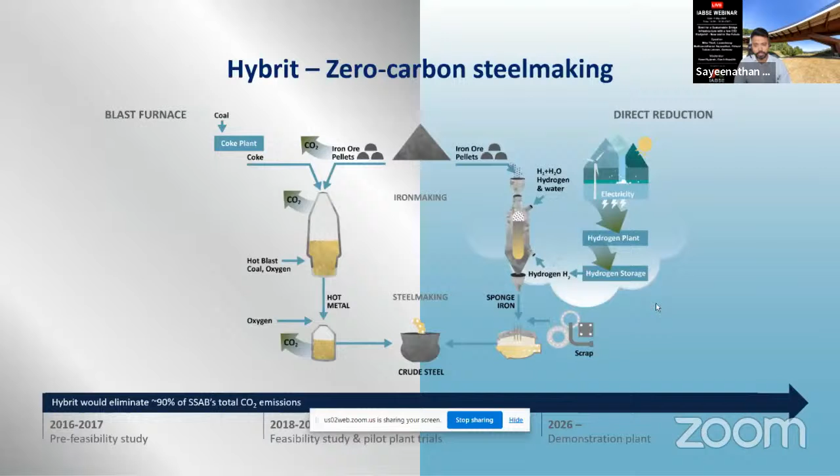And by 2026, we will have the commercial availability of fossil-free steel. Moving on to the next one is the SSAB Zero. Recycled material will be the raw material for this. But again, here as well in the value chain, when we consider scope 1 and scope 2, there won't be any carbon emissions. It's not completely zero, but so little that when we round off, it's almost zero. And when we consider scope 1 to 3, it's about 0.3 tons per ton of steel.

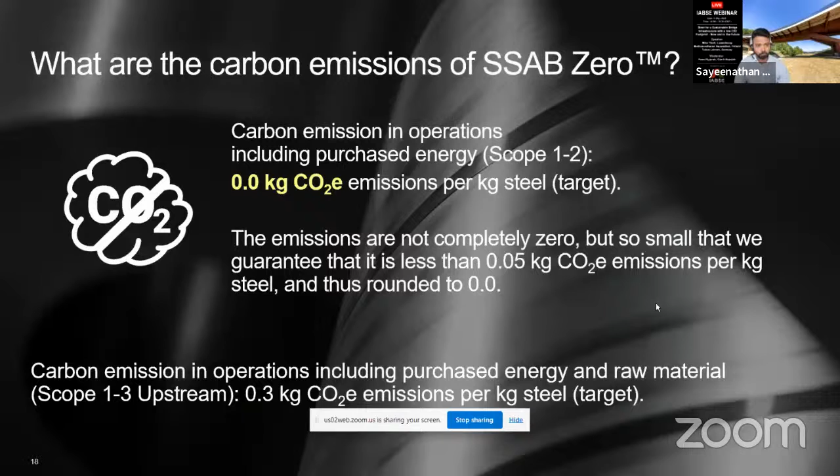We are the first to introduce fossil-free steel in the market. By 2022, we sold already 500 tons. And we plan to go fossil-free in the entire operations by 2045, which has been brought forward by 15 years, so by 2030. We would like to go fossil-free in our entire operations.

Moving on to the last solution of sustainable upgrading to try and decarbonize the construction industry. Sustainable upgrading is about using high strength weathering steel where there is no need to hot dip galvanize, no need to paint. And when high strength steel is used, as the other speaker said, there is reduced embodied carbon, and also ease of using and savings from welding and so forth. We call this using steel better.

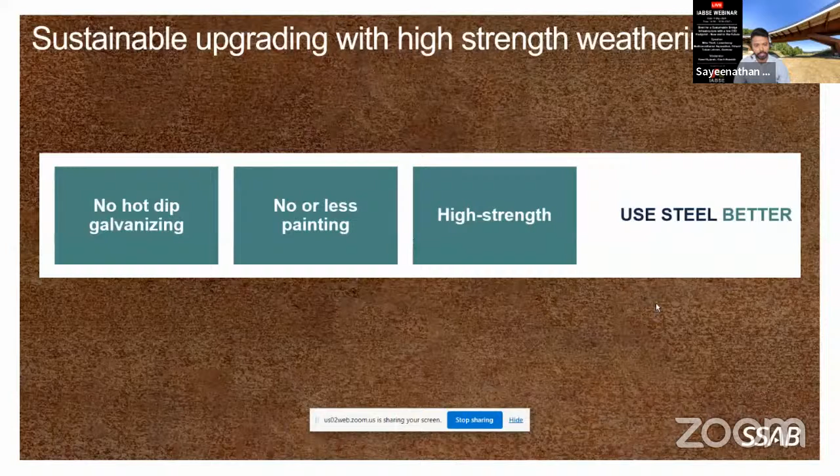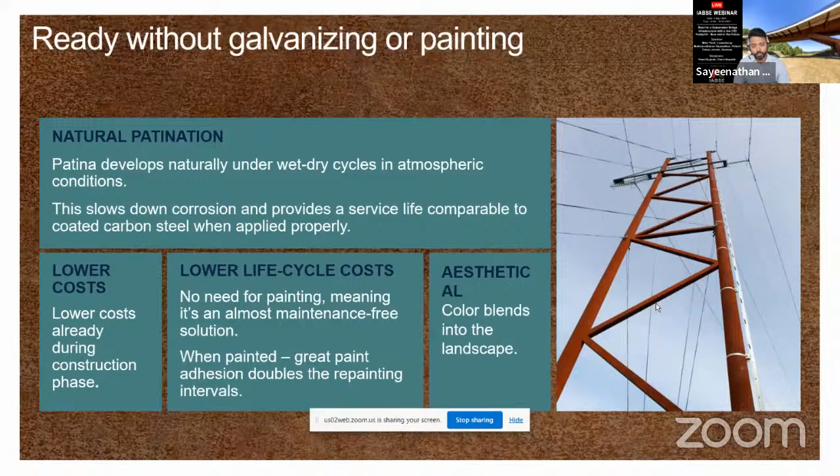I don't need to explain so much about weathering steel, but the natural patina acts as a barrier to reduce the rate of corrosion. In some studies, it has been proven that weathering steel has lower life cycle cost compared to painted steel or galvanized steel. That's also one of the reasons it's called sustainable upgrading when you use painted carbon steel and then upgrade it to weathering steel, especially if it's high strength.

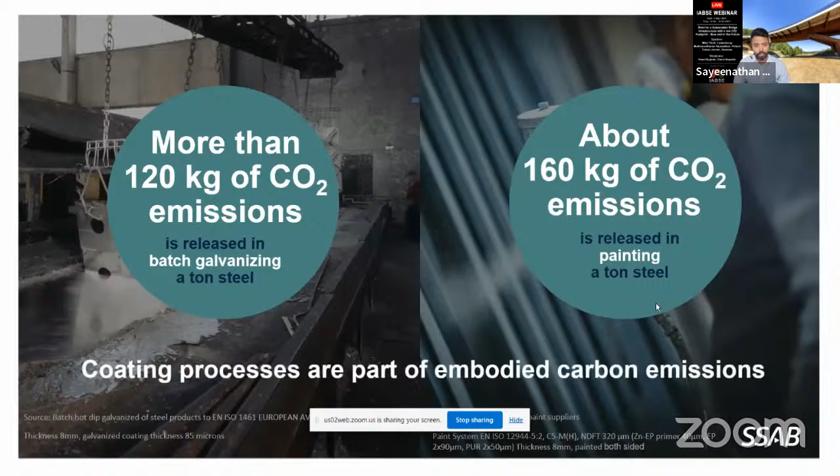To give an idea of how much CO2 emissions could be avoided by moving from painted or galvanized steel to weathering steel, for a given thickness, it's about 120 kgs of CO2 emissions released by batch galvanizing a ton of steel. And when you paint, depending on the coating - this is 320 micrometers in C5 environment - it's about 160 kilograms of CO2 emissions released by painting a ton of steel. So these are avoided with weathering steel.

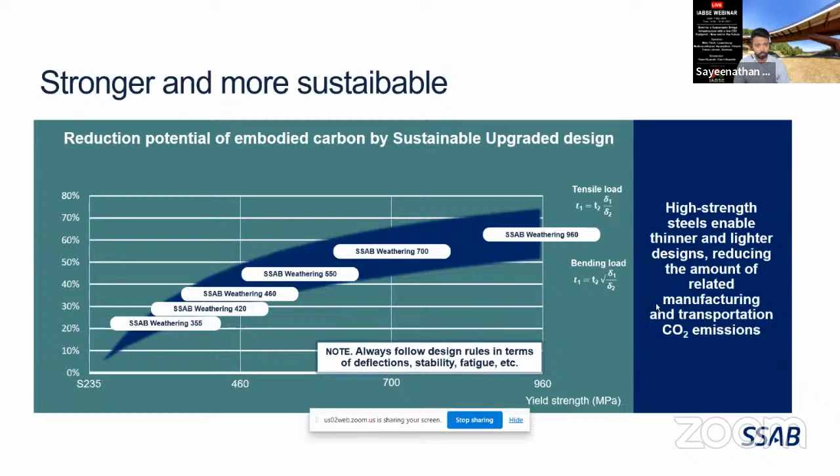And then, of course, when you upgrade from low strength to high strength weathering steel, in SSAB we offer weathering steel from 355 yield strength megapascal levels up to 960. So there is a big scope of reducing the amount of steel that you use, which not just helps in fabrication, but also reduces the embodied carbon. I would like to say that SSAB weathering offers one of the most sustainable options in reducing the life cycle embodied carbon of the construction industry.

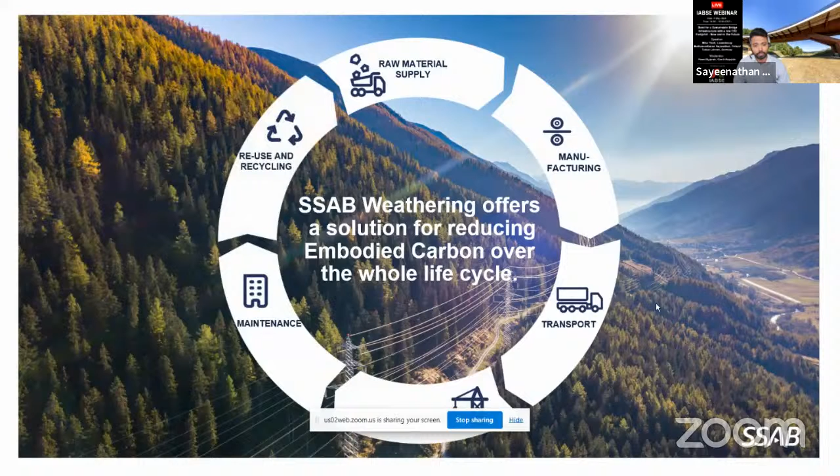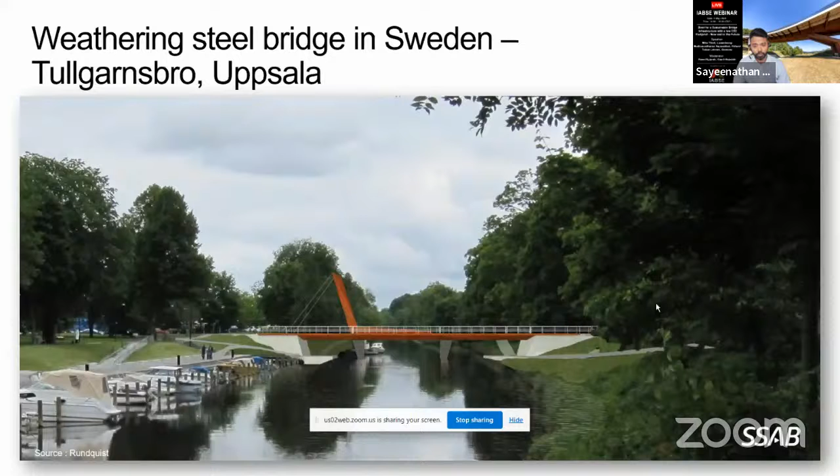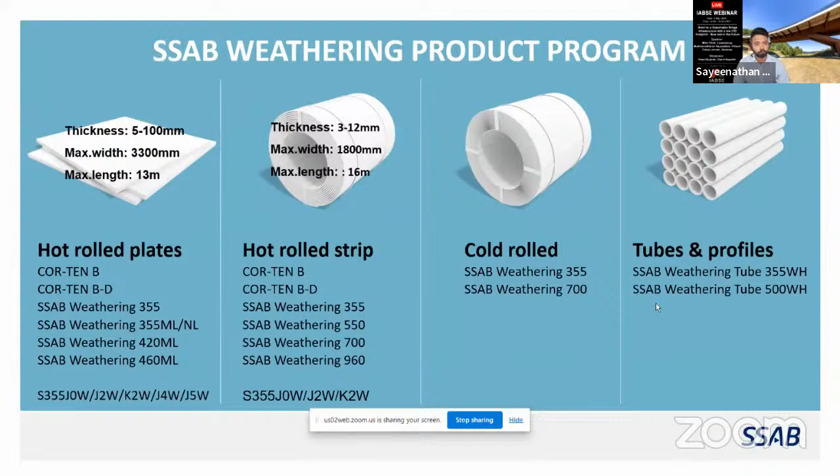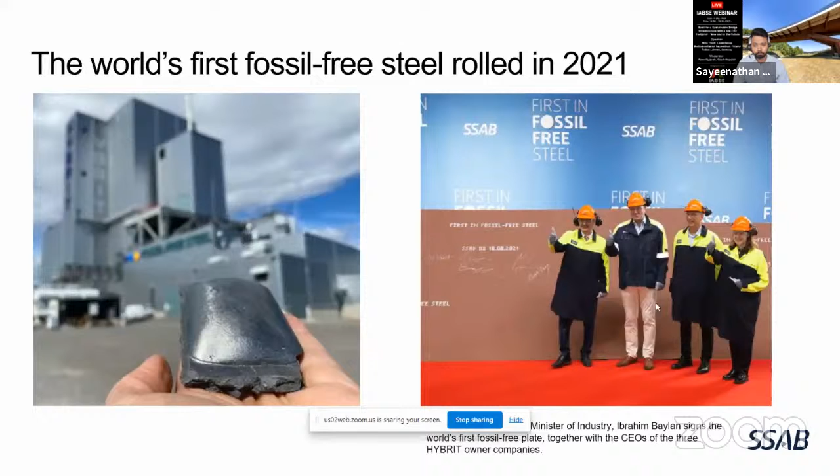This is the first fossil-free steel that was rolled in 2021, and the Minister of Industry was also present in that ceremony. And I'd like to inspire you by saying this is the first mining truck made using fossil-free steel, and we finally hope this will be expanded to many other industries.

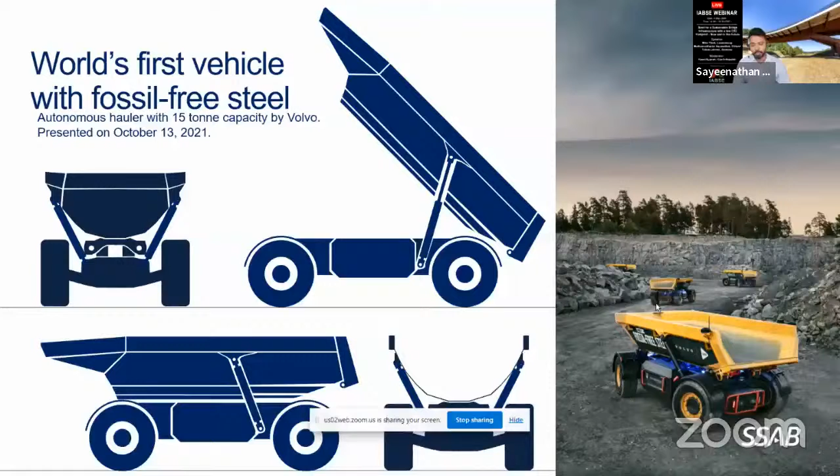So I'd like to conclude by saying that the prospect of building a bridge with fossil-free steel in the future is not far away. And I urge you to mention the carbon footprint as one of the parameters in the design. Ladies and gentlemen, thanks for your time.